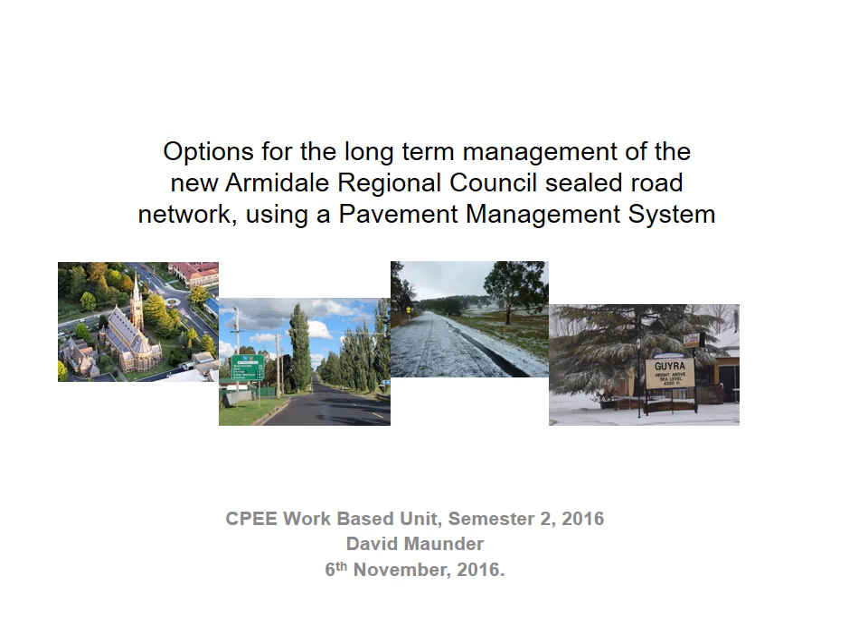The purpose of this exercise is quite clear. Following the amalgamation of Armidale Dumaresq and Guyra councils, the Guyra and Armidale councils' asset management staff in the new merged council authority or road agency will need to consider how best to combine and harmonise their work practices that relate to asset management of the sealed road network.

But equally, following an audit process of 2015 of both councils before amalgamation, it was considered by the council auditors that each organisation had differing approaches to the way that they both manage and value their assets. Therefore, a harmonisation process would be very important.

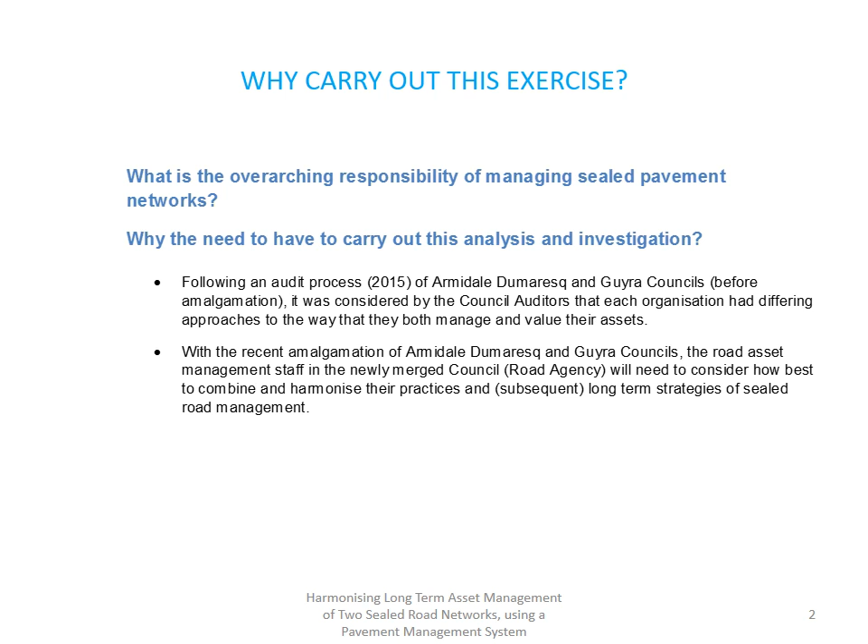The objectives of this study are multiple. They are firstly to assess the two separate networks of the previous two councils and the long-term renewal requirements each council had in place previous to amalgamation, and then look to harmonise these strategies with the use of optimisation and predictive software that replicates the manual process to quantify the savings and or define the overall

long-term pavement improvement that could be achieved by using the advanced modelling and optimisation techniques so as to plan future maintenance requirements or trends as a result of various treatment scenarios that decision makers within the new council road agency could consider.

This study will involve scenarios principally of harmonising the management strategies with the existing maintenance and capital budget allocations for each ex-council, which may well reduce the current condition of one council and improve the overall condition of the other. The assessment will likely provide scenarios that allow the road management decision makers to have strategies that move away from automatically selecting worst first roads and road segments to optimise works that allow for earlier intervention as per sound asset management principles.

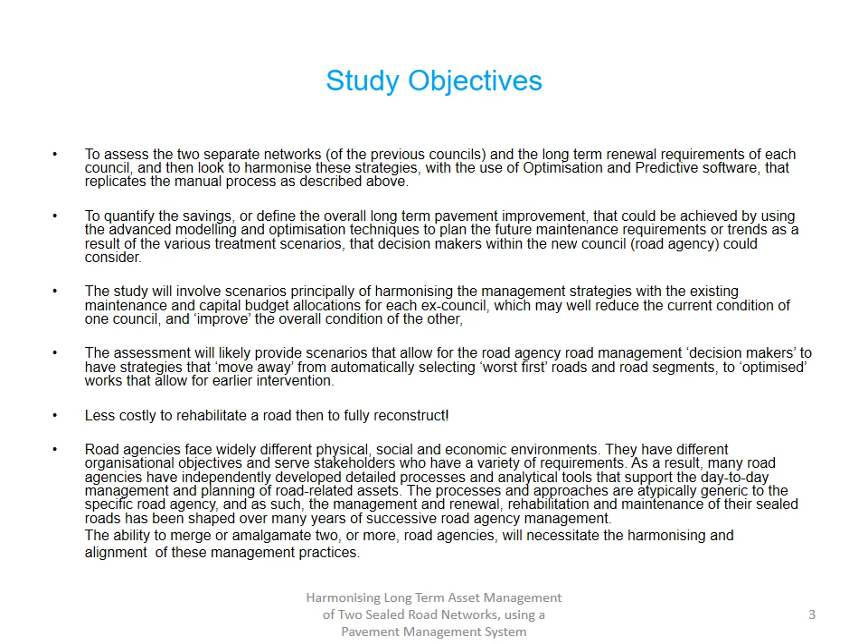The question comes up as to what road management parameters the two councils' asset managers should look to align as part of this exercise. This should be an ongoing program of asset management for each respective network. A comprehensive sealed road network harmonisation process for the new council should assess work practices currently employed by the two

previous councils, maintenance and rehab or renewal strategies that are utilised, standards and specifications that are adhered to or not adhered to, levels of service, their existing budgets, both operational and capital, their valuations that have been carried out as per state rulings, unit rates of specific works as like for like and actual replacement, and the depreciation and residuals.

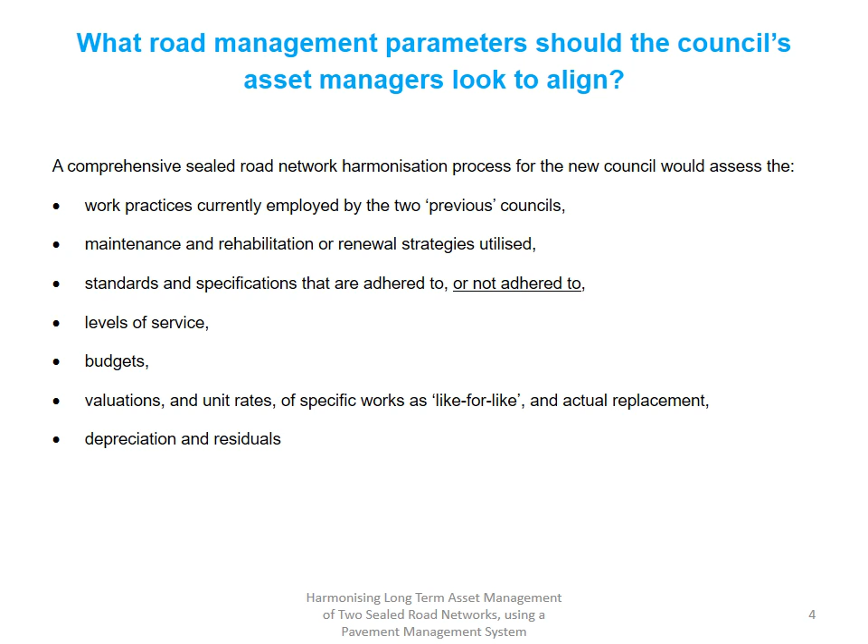How can we do this analysis? How did I do the analysis? If a road agency asset management team know the aspects of the sealed road network that they manage, record and keep up to date, in this case with the two respective networks, they would keep information such as the type of pavement and wearing course of a particular road segment that constitutes the complete road

network. They would know with experience and collection of ongoing data the current road condition, both structural and surface, of the pavement and wearing course. They would keep records of treatments, rehabs, reconstruction and maintenance. They would likely know the traffic data and the type of traffic classes, i.e. how many heavies there are, how many big trucks are going over their roads.

These then can be used in what's called a pavement management system, or PMS, that should incorporate a recognised pavement deterioration and mode of failure progression, or a software, and employs predictive algorithms and programmed intervention times to strategise or present scenarios for longer term treatments that the new council road agency can consider.

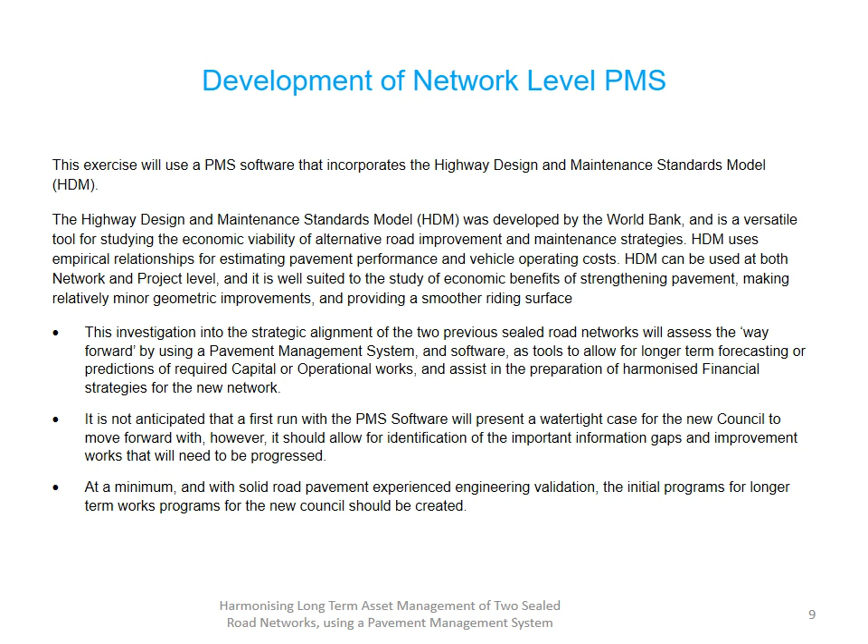Network level pavement management systems. In order to use a pavement management system, one must have a pavement management system, and what data should be available. The two sealed road networks, as part of this investigation under the Armidale and Guyra Council, should or would and do consist of a correctly created register containing roads and road segments, and a discrete road numbering system for each individual road identification. The road register containing the individual roads will then display a suitably created segmentation or blocking of that road for better identification of condition assessment.

Rather than considering the whole of the road, the expansive road, we break the road down into segments for more workable pieces. The register of roads and segments will have a host of condition parameters collected in the field, such as roughness, rutting, cracking, that is industry recognised nationally and collected by professional means. The roads within the register will be suitably filtered to allow for hierarchical prioritisation or relative importance of the road, using data such as traffic equivalent standard axles, strategic economic corridors, and prioritisation.

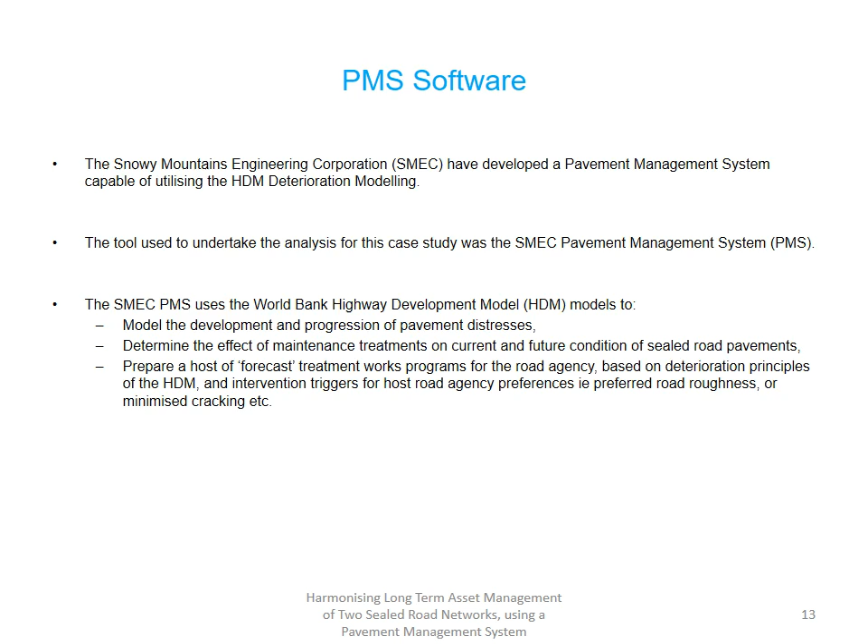A quick overview of the condition data used in PMS modelling: roughness, rutting and cracking are the primary condition parameters. Roughness is a measure of the shape of the pavement and is a good indicator of the health of the pavement layers. The measurement is commonly carried out using an instrumented vehicle that uses multiple laser beams to measure the profile of the road at highway speeds, with the measurements set by international standards, and they are non-subjective.

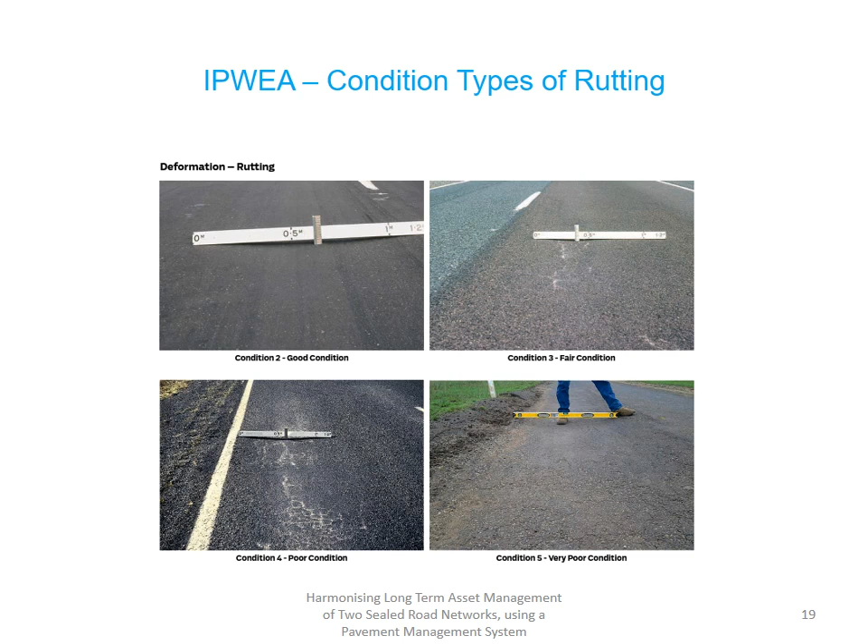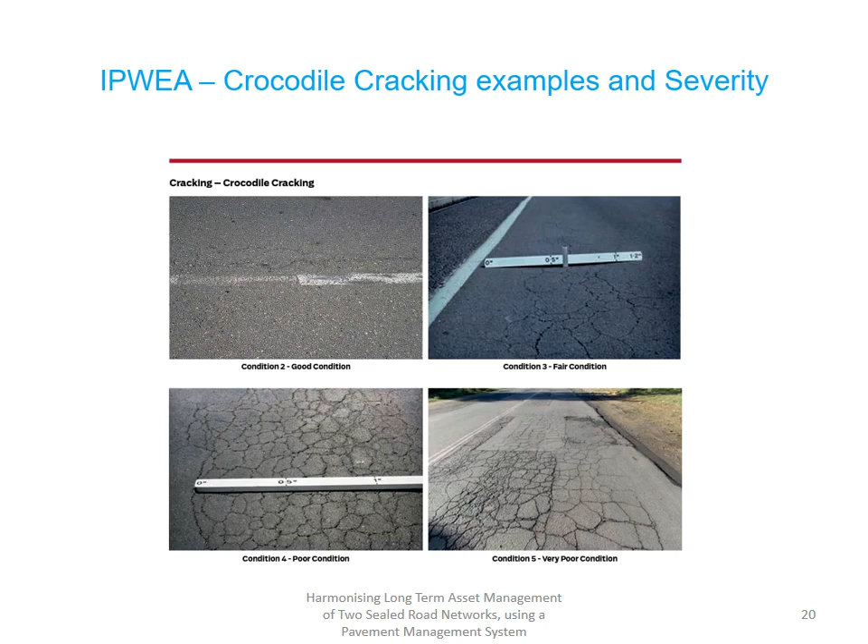The SMEC PMS involves much number crunching. The condition data as collected is fed into the SMEC PMS and is then capable of being produced as a series of health indices. For this assessment, I'll be primarily using the PCI, or Pavement Condition Index. This is a summary condition score that is calculated for each road segment based on the levels of each of the individual distresses.

The PCI is calculated based on a deduct point system where the default score for a road pavement in perfect condition is given as 100, but then points are deducted for each different type of distress recorded based on the severity of that distress. Once a PCI is calculated for each individual road section, it is then possible to calculate the area weighted average PCI for the entire network.

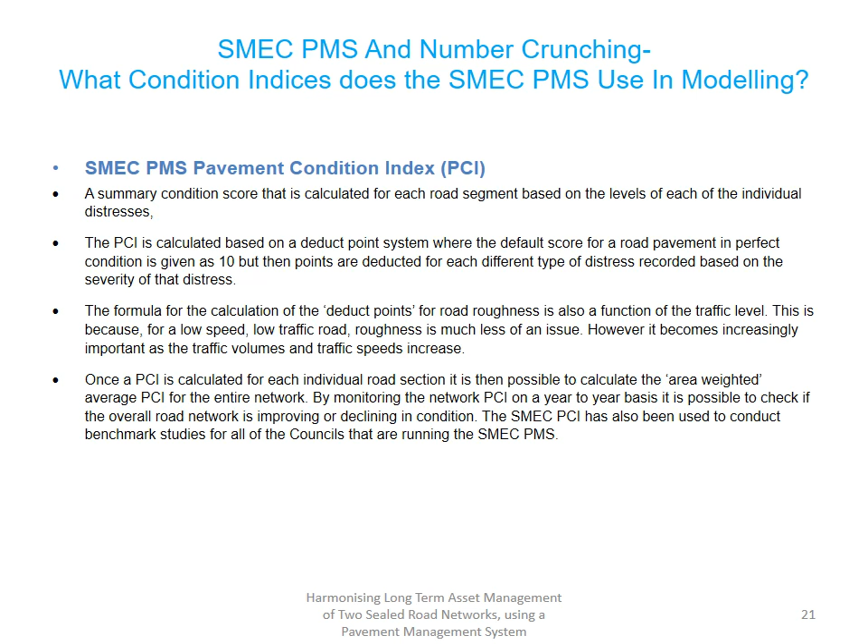By monitoring the network PCI on a year-to-year basis, it is possible to check if the overall road network is improving or declining in condition. The SMEC PCI has also been used to conduct benchmark studies for all of the councils that are running the SMEC PMS. Other parameters and characteristics of the road network that the SMEC PMS can utilise primarily include traffic, and collecting traffic information consistently facilitates the strategic planning of road networks.

Traffic volumes and trends in vehicle classifications are an extremely important criterion in choosing the appropriate road profile configuration. They can vary along a link, and different road profiles are appropriate. The type of vehicle using a road can have a major influence on road geometry and pavement structure. Traffic information should be collected based on the Austroads vehicle classification system.

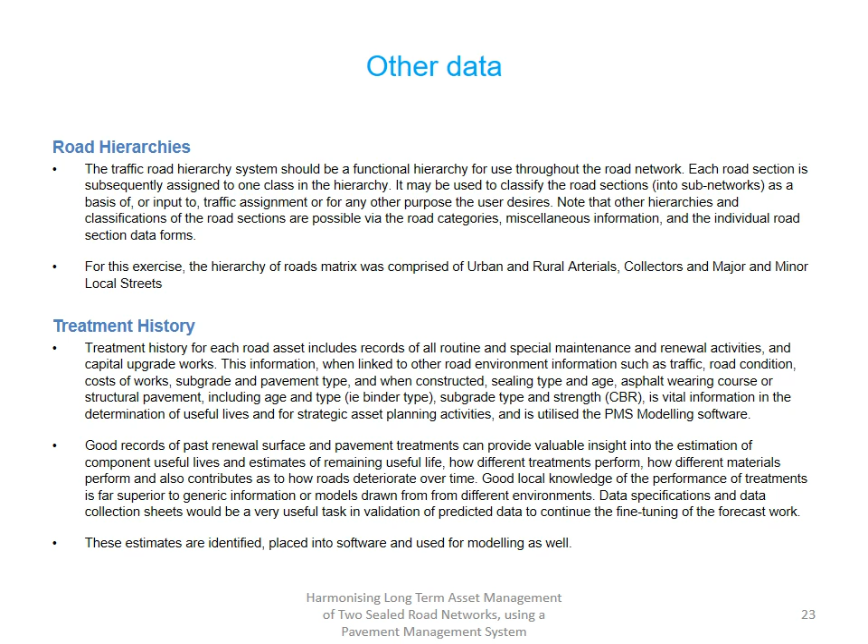Other data to be placed into the PMS include road hierarchies and treatment history. Good records of past renewal surface and pavement treatments can provide valuable insight into the estimation of component useful lives. As part of determining the overall condition of the two council networks, we need to consider the current state of play. What data do we have from these two organisations and their sealed road networks?

We need to collect this data for the PMS to derive the current status of the two networks' pavement health. As part of the overall transition from the two separate sealed road networks to one complete network under the management of Armidale Regional Council as the road management agency, an assessment of the previous networks was required to allow for a structured harmonisation of condition. A condition survey of both councils was carried out by the same professional road condition assessment consultants, Australian Surface Testing, in both 2008 and 2014.

AST utilised modern techniques such as a profilometer to generate roughness, rutting and cracking data. Surface texture, edge breakage, flushing defects, etc. are all collected for both the Armidale and the Guyra sealed road network. Whilst cracking data was obtained for the Armidale network in 2008 and 2014, Guyra Council elected not to have cracking data collected in 2014.

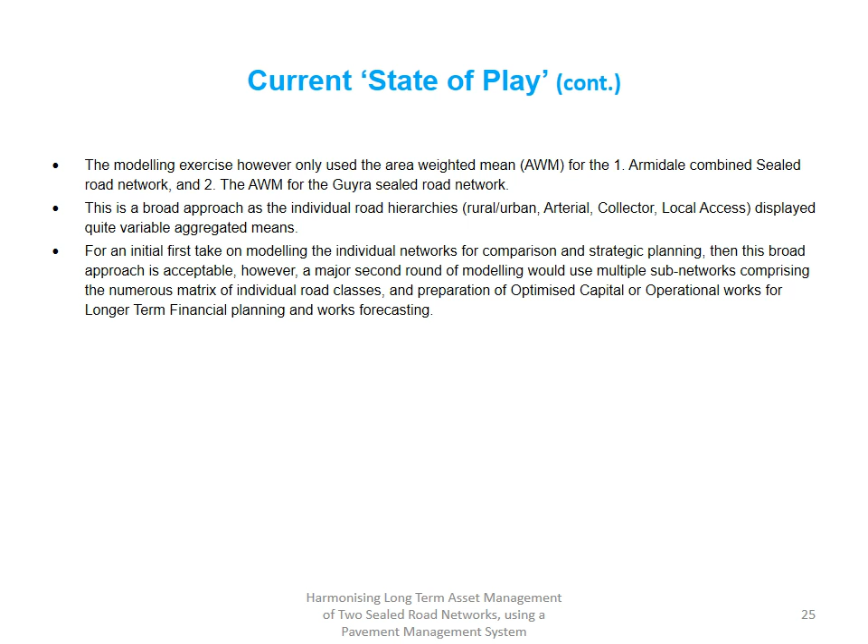What do we know of the existing networks? We have two rural regional councils located in northern New South Wales, referred to as the New England. The rural sealed road networks are subject to reasonably low traffic volumes in the rural areas. Another significant feature is the higher altitude of the two road networks. In winter, sub-zero and frosting influences are a major issue, particularly in Guyra, which sits at about 1200 to 1400

metres in elevation. The Armidale sealed road length is 412 kilometres for both local and regional status roads, of which 233 kilometres are rural and 178 kilometres urban, and a total of 1,081 segments. The Guyra sealed road network is about the same, at 431 kilometres, again for both local and regional. However, their network is predominantly rural. They have almost 400 kilometres of sealed rural roads and 35 kilometres of urban roads, comprising 510 segments.

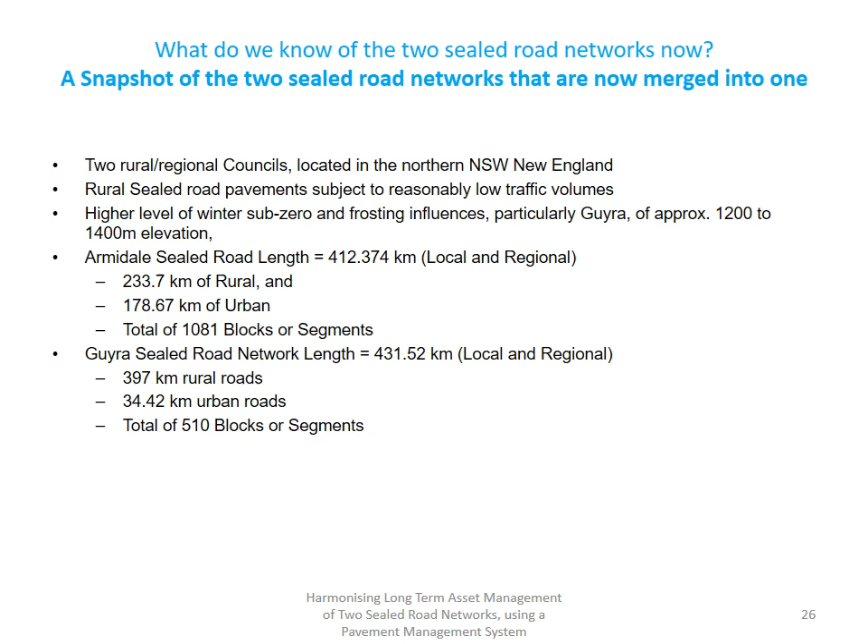It's also worth noting the yearly budgets for each council, that is Armidale and Guyra. Prior to the amalgamation, the Guyra Council budgeted for around $1.3 million for capital works and about $1.3 million for their operational or maintenance works for their sealed road network. In the 2017 financial year, Armidale has allocated approximately $5.4 million to capital and about $1 million to operational works. Again, these are a combination of general fund or rate income plus all grants. It's worth noting that in the last 2016-2017 financial years, there's been a higher proportion of grants, particularly in the Roads to Recovery area.

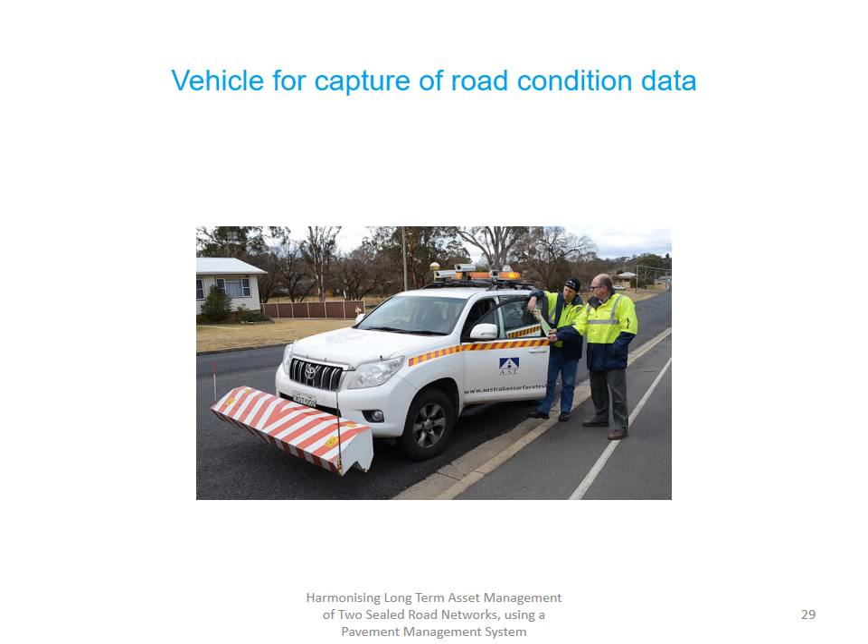As indicated previously, the major step in being able to do the condition modelling and predictive optimisation work for both the two previous council road networks and the new network is importing all of the condition data into a PMS. As such, the two road networks were combined into a SMEC pavement management system database and then processed to generate all of the possible health indices. The first parameter to be obtained, as I've indicated, was the PCI for all of the road hierarchies, which was then further filtered down to obtain the area weighted PCI for each of the different hierarchy segments.

The case study exercise is one of applying a combination of optimised strategies for the combined Armidale and Guyra sealed road subnetworks, using the benchmark of PCI, the Pavement Condition Index, and roughness minimisation against the optimising parameters of reducing user and road agency costs, or the overall maximising of the network pavement condition, the harmonisation of the condition of the two networks, and then to set the path for further detailed modelling, and an overall minimisation of maintenance and cost that the new merged council can use in community consultation, levels of service, and setting yearly budgets for the capital and operational road management divisions within its long-term financial plan, resourcing plan and operational plan.

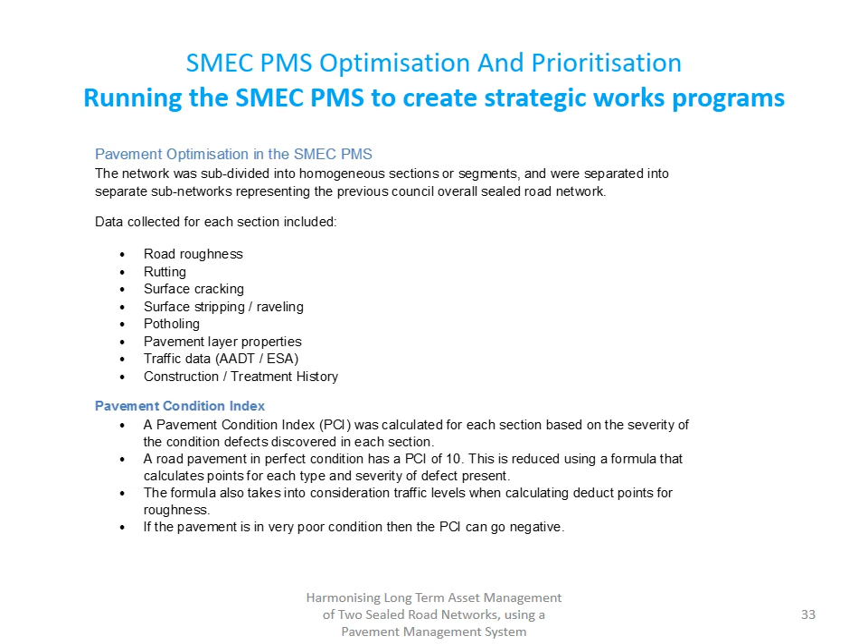After having placed all of the data in its requisite database, the SMEC PMS will now be used for analysis. The tool used to undertake this analysis, as indicated, is the SMEC PMS software, which uses the World Bank HDM models. The optimization factors are going to be run in one of two ways, either to determine the maximum network condition that can be achieved based on a nominated annual budget constraint, or secondly, to determine the annual funding required to achieve an annual target network condition level.

The optimization parameters that can be selected are maximizing the network asset value, minimizing the road user costs, minimizing the routine maintenance costs, minimizing the total costs, i.e. user cost plus agency costs, and lastly maximizing the network pavement condition index.

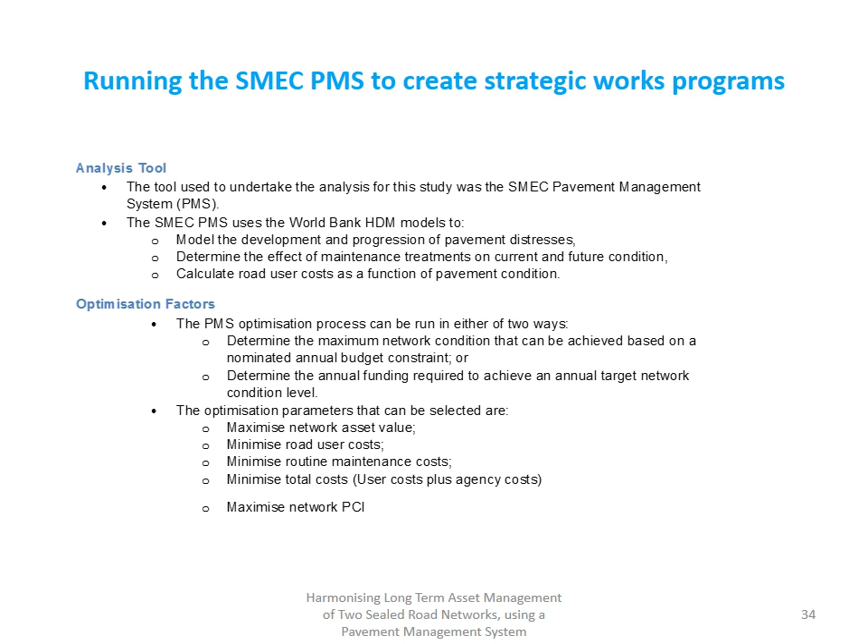If, for example, the surface is currently a spray seal, then the software opts to replace with a spray seal, not with an asphalt. And in option 1, it will only be applied if roads are in an urban and rural environment, i.e. all. Wide cracking must be greater than 40% if roughness is less than 90%, and wide cracking must be greater than 25% if roughness is greater than 90%.

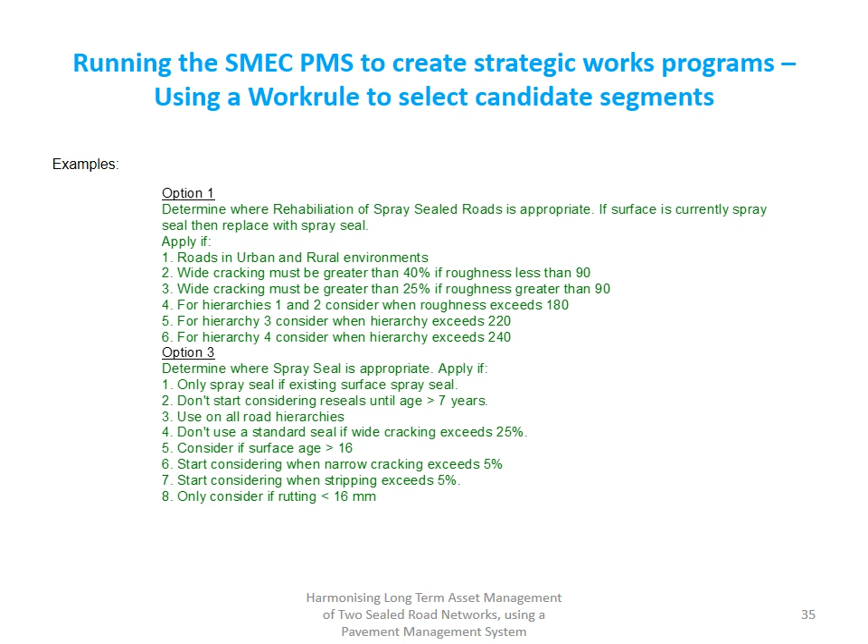As mentioned, the SMEC PMS will be used to create the strategic works programs. The major component of the SMEC PMS is its ability to optimize and prioritize those road candidates under a regime of agency and user preferences, aiming towards an overall improvement of the network to provide the short and longer term strategic goals for the asset management of the whole network.

The basic explanation of the 5 methodologies that I have used or could have used are: the first, maximizing the asset value, whereby this methodology, if selected, would consider the best treatment available to maximize the life of the wearing course. Asphalts are of course the optimum treatment, providing the maximum life. So if the rule base allows, it will select asphalt over a spray seal or a micro seal if I select this methodology. It is used if a council has a healthy budget, as naturally you will utilise the best treatments available to maximise the life of the asset.

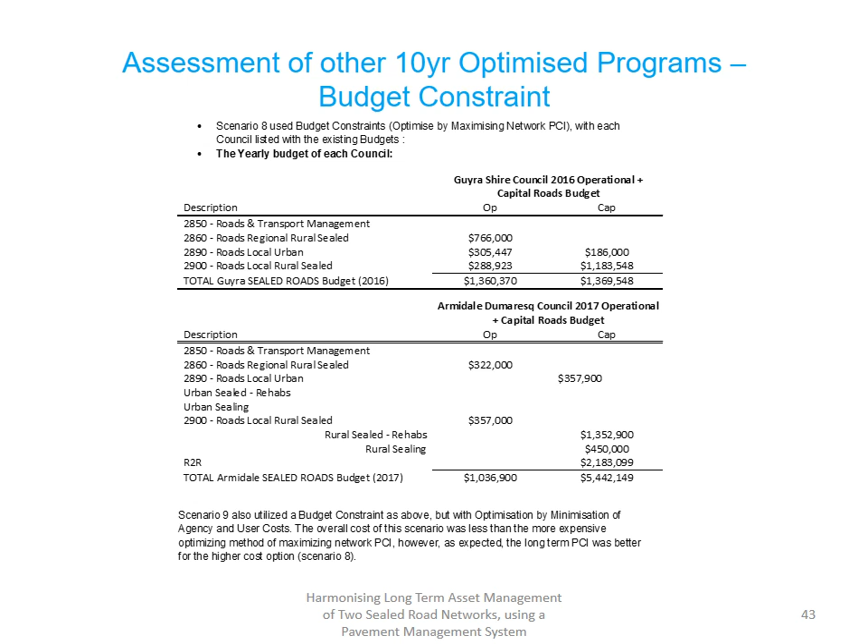Following all of these results, I have adopted PMS Scenario 7 as a means by which the two councils can focus on asset maintenance, long-term strategies and harmonisation, which involves not just selection of the worst roads for both separate networks, but a strategic approach to the 10-year long-term works programs, which will likely involve a host of seal and rehab treatments, but at intervention times that will prevent those roads reaching their worst condition.

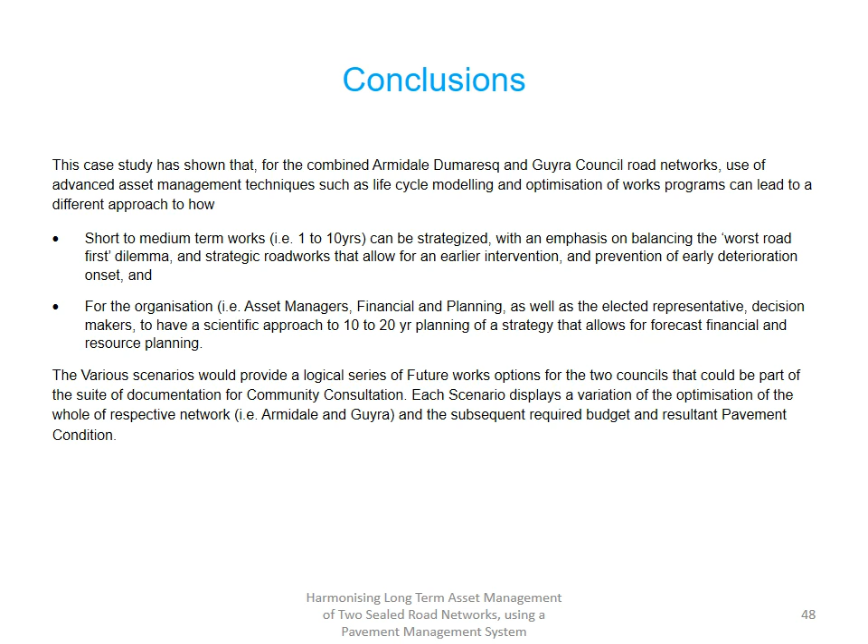However, it must be strongly pointed out that this is a first and broad assessment of the two networks. Much further refinement would be needed to reclassify the Armidale and Guyra road network segments into a hierarchy system of major and minor roads, i.e. collector and local access, urban and rural, and then reapply the optimisation and prioritisation routines of the PMS, but also in consideration of the type of intervention triggers that the community may consider warranted for greater importance, such as user safety, school bus routes, roads of common economic significance. These roads will then be treated with a prioritisation for the new combined network.

Various scenarios should then be assessed as to what would constitute the most logical and permissible against the Council Road Authority's ability to fund the capital and maintenance program, bearing in mind that a reduction in capital rehab and renewals to allow for a reduction in the overall budget to help facilitate an overall condition improvement in the road network will also give rise to a disproportionate increase in the operational or maintenance requirements of that network.

Further investigations into more refined works optimisation and prioritisation, combined with the results of community consultation levels of service, a combined condition assessment program for the complete network, a better capture and filtering of the traffic data and traffic class will all lead to more accurate strategies for longer term works programming and make the harmonisation process that much easier.